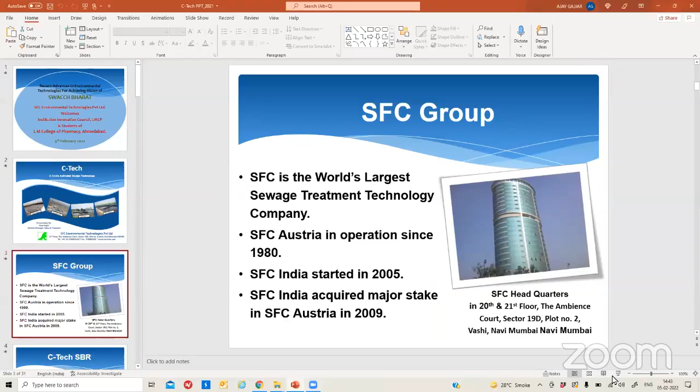Sir, your screen is not visible. You can share your screen, your presentation. Is everybody hearing my voice? Praful bhai? Your voice is available. The presentation is not seen, so you can share it again. Now it's okay? Yes. Now you can see, na? Yes, that's fine. So let's be fast.

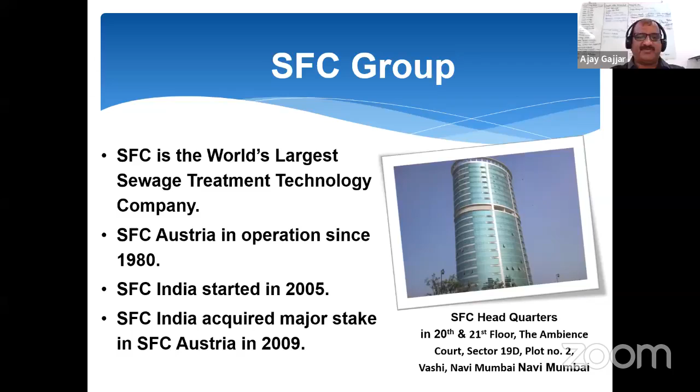SFC is the world's largest sewage treatment technology company. This is basically an Austrian company. In India, we started in 2005, and in 2009 we took the major stake in SFC Austria. So we can say it's an Indian multinational. So what's C-Tech? C-Tech is just a trade name.

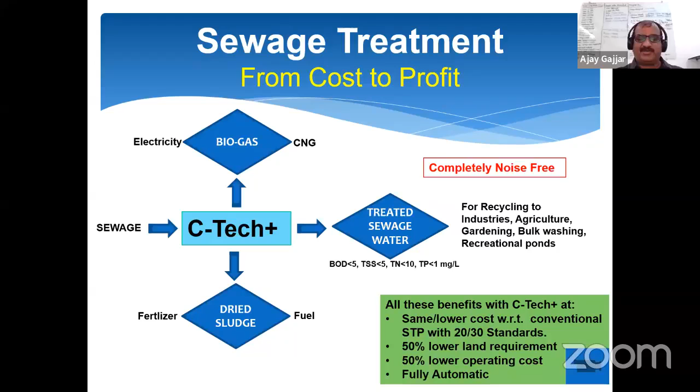You can see that nowadays, with all technologies, if we count the total MLD, we can say 18,500 MLD. And by C-Tech, our SBR technology, we just reached 14,000 in 2021. It is much more even in 2022. Why this thing? Because looking at the norms, the treated water norms, this technology is very robust with lesser O&M. It produces recyclable water at a very low operating cost. That's why we get such large acceptance from government organizations.

We can see here it produces recyclable quality treated sewage. BOD is 5, COD is 50, TSS is 10, nitrogen 1, and total phosphorus less than 1. You can see this in the 2013 CPHEEO manual and National Green Tribunal 2019. They recommended BOD 10; we are giving even less. COD 50, TSS 10, total nitrogen and phosphorus removal. So nutrient removal parameters they have added in the manual. So every STP has to fulfill this criteria.

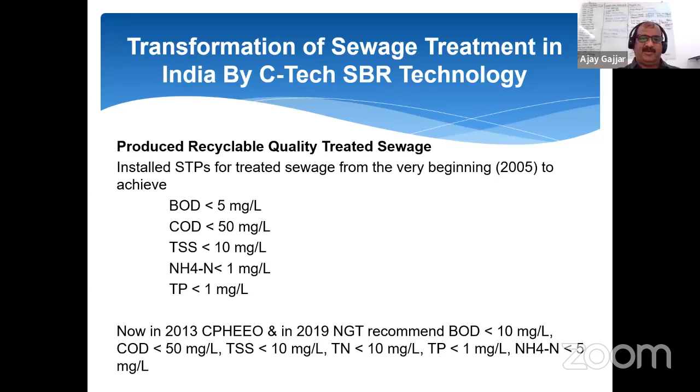Hello. You can listen, na? Yes, sir.

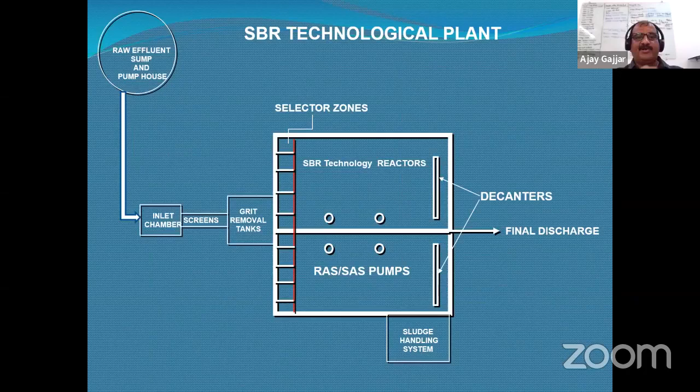All this process comes in a single basin, in 3 cycles. First the raw sewage comes, then filling and aeration for 1 hour, 1 hour is the settling period and 1 hour is decanting. Decanting means we are removing the top supernatant water by our decanter devices. All this process is controlled by our PLC SCADA. So a good monitoring system, no human touch. So irrespective of the inlet design parameters given, we can get very good recyclable quality water.

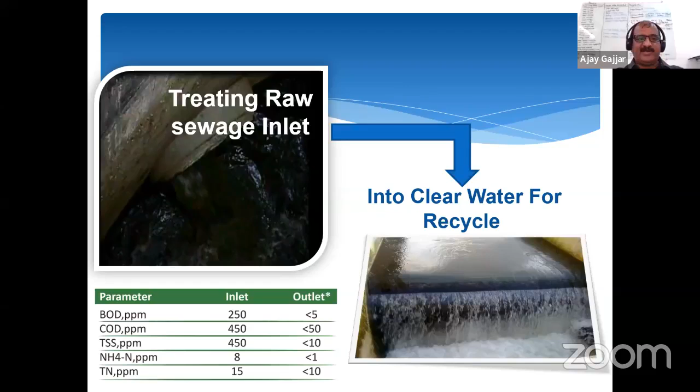Here we can see the raw sewage and how we treat it. BOD is less than 5, COD 50, total suspended solids 10, and nitrogen and phosphorus removal. Another remarkable thing is that we have reduced the land requirements. In government projects, acquiring land is a huge and very critical task. Even government departments internally cannot acquire it because of so many legal procedures. So the earlier pond culture is now gone. Now a lot of societies and residential plots are adjoining the STPs. So land is very important.

Another thing is what happens in these kinds of infrastructure projects. All the sewage treatment plant works come with 5 years O&M, 10 years O&M, 15 years O&M. In some bid modalities, all the electricity power has to be borne by the contractor or otherwise by the government. So after this technology became available, we formed norms so that every technology, including conventional ones, has to be compared. Suppose my capital cost is less, but my O&M cost is very high due to power consumption.

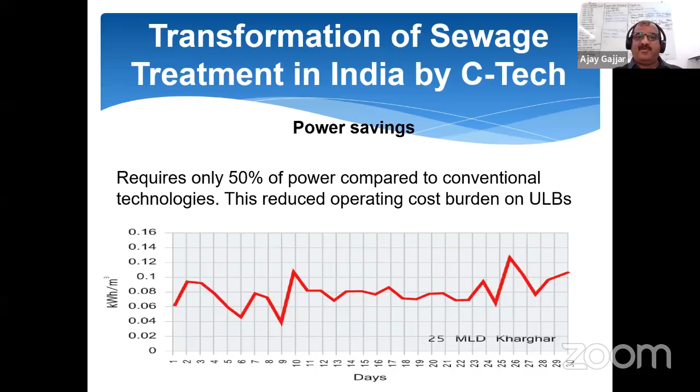So we have inserted many evaluation points based on land and power. So the government can get good quality technology that consumes less power and less land. So there are weightages there. Mostly we consume 50% less power. We can also generate gas, because if my inlet BOD is consistently more than 300, we can utilize the generated gas for power.

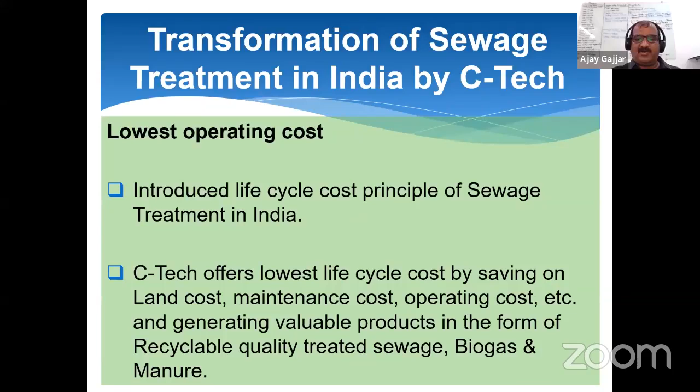As I told you earlier, we have introduced this life cycle cost principle in the sewage treatment plant. Earlier there was nothing over there. Nowadays the government is calculating it. Now we have offered the lowest life cycle cost by saving land cost, maintenance cost, operating cost, and simultaneously generating valuable products in the form of recyclable quality treated sewage, biogas, and manure that is fully digested. We can directly use it on all our crops because it's fully digested.

You see that all the plants are controlled by the PLC SCADA system. See, there are many points, because what we are doing in sewage, particularly this biological process, is just a game of air. Suppose I have to remove some BOD; I have to put air in mechanically or naturally into that water. So per kg BOD removal, I need to supply some quantum of air. It is fixed. What we have done is control by computer how much air I require.

So that's why I save the most power, because of these SCADA systems and the oxygen uptake rate that we have given in our technology and our software. So see, this biological treatment is just live bacteria.

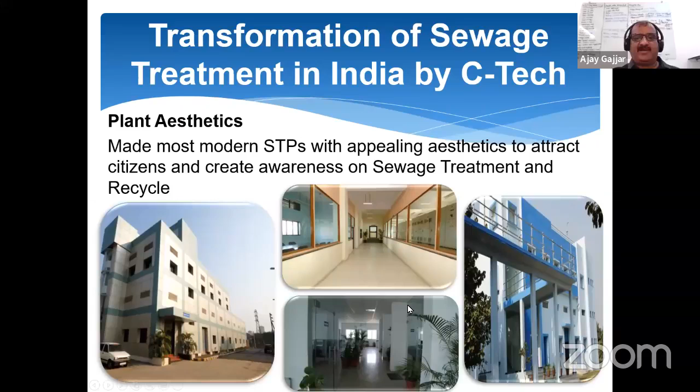You see that we have changed the concept. As I think many of us visited abroad, we must have seen facilities like commercial buildings. So we brought this concept here. You can see this is my 100 MLD plant building. It looks like a corporate office, inlet facilities are there, hygiene, and we have added aesthetic value. It's very remarkable. This is a remarkable thing in India. We just changed the concept.

Treated sewage is not something you can just throw out. It's a source of water. An additional source of water for non-drinking applications, that is industrial, construction, bulk washing, horticulture, agriculture, etc., in non-potable use in India.

We have a setup in Malaysia. That is our largest plant, more than 400 MLD. Malaysia biologically treats the water and supplies it to Singapore through a pipeline. Singapore has tertiary treatment through RO, and they use that water for drinking purposes. In India, at present, there is no need like this. Even if we just fill the gap of non-potable water with this kind of recycled water, it's a big deal for India.

So the government is also sensible. The current government, for the last 10 years, infrastructure projects are developing under Nitin Gadkari sir and many other ministers. They are very dynamic, and they have taken initiative for this large format. Unless and until there is support from politicians and this movement, we cannot get success. It's not only the technology. We are grateful to them and to the people also. And the awareness also; nowadays people are aware.

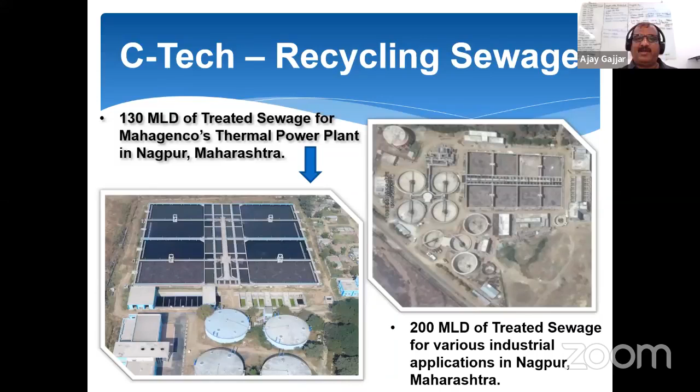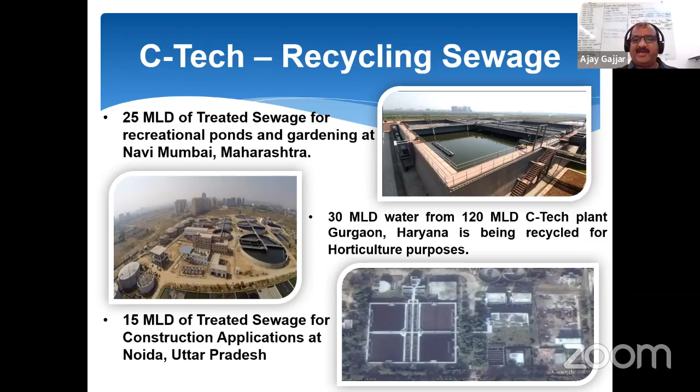So again, we have concentrated more on how we can further improve, because we have just saved power through our technology. We are also using some innovative ideas, because again there are the blowers, how we can use some technology. So our work still continues, and we are still improving, but a lot of innovations we have incorporated.

So adapting this treatment process is an improvement. We have improved our decanting procedure. Decanting means the removal of the water from the tanks, and it is connected with our PLC SCADA. We use high efficiency and long life diffusers. Diffusers are installed in the bottom of the tank. They are providing the air. So we brought this technology from USA, from EDI, and we also improved the material, you can say the poly.

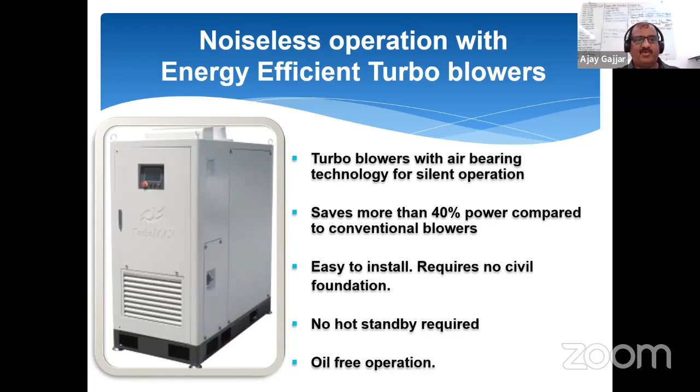Again, besides the liquid waste and treated water, many of us think about what you are doing about the sludge that you are removing. We are removing the sludge at 20% consistency. Still, we have to increase the consistency and make it more dry. So we also introduced the solar sludge drying system from our German associate group. And that dried sludge has a calorific value of about 3000 kilocalories per kg. So absolutely, it's good for cement industries, using it in their furnaces.

Once again, with our SBR technology, nowadays we have expanded in a huge way to a number of plants in India. Now the department is also thinking about further treatment. They are using sand filter beds, which require huge space and different kinds of systems, and the O&M cost is also more.

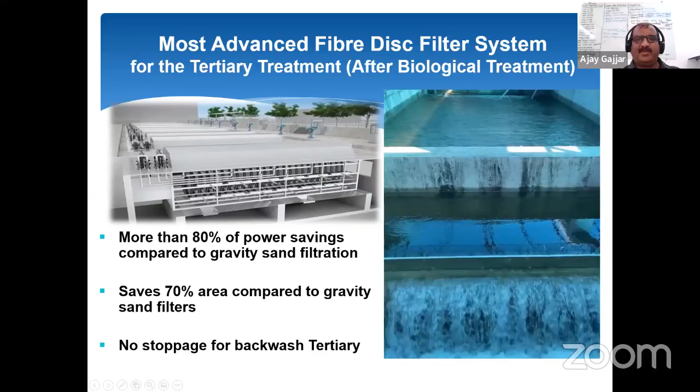Here we can see this is a fiber disc system. The SBR treated water comes here and is further treated, and we bring down the total suspended solids to less than 10, less than 5. Here in the installation you can see the fiber disc. The online cleaning is totally operated by SCADA on a level basis. And there is a total suspended solids TSS reading sensor over there. So if TSS is higher, the gate automatically will not let the water enter this chamber.

This picture you can see was recently inaugurated by our Honorable Chief Minister, Sri Bhupendra Bhai, in Sayaji Garden, Vadodara Municipal Corporation. You can see here the quality of the water. They are using this water in the gardening and for the Vishwamitri, because the Vishwamitri riverfront program will be declared soon. So first they have tapped all these things and improved the water quality.

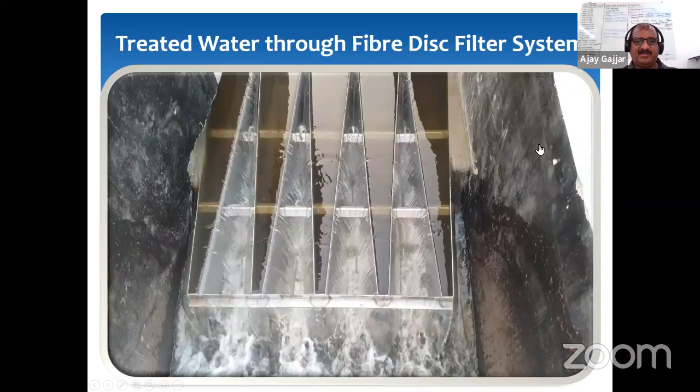So C-Tech can contribute to the state in many ways: providing efficient and reliable treatment of sewage water, reducing water pollution and improving public health, saving our water bodies by completely eliminating the flow of untreated sewage, and establishing water security in the state by converting sewage into recyclable quality water. We help the nation save precious potable water by reuse of treated sewage for various applications, also reducing the burden of land acquisition by saving precious land.

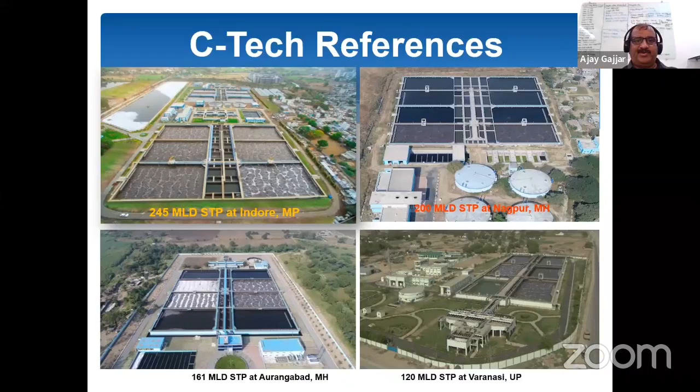This is a completely odorless plant, and adjoining it there is a human community living very close by. This is our home ground, Ahmedabad Municipal Corporation, which recently set up a 155 million liter per day plant.

Here is the primary clarifier, this is the gas chamber, this is the admin building, and this is another gas chamber where they will produce gas. We recently commissioned this gas installation; the gas generation units are under installation.

Treating water, they have already started. I appreciate the efforts put in by everyone, including the corporation and the contracting fellows.

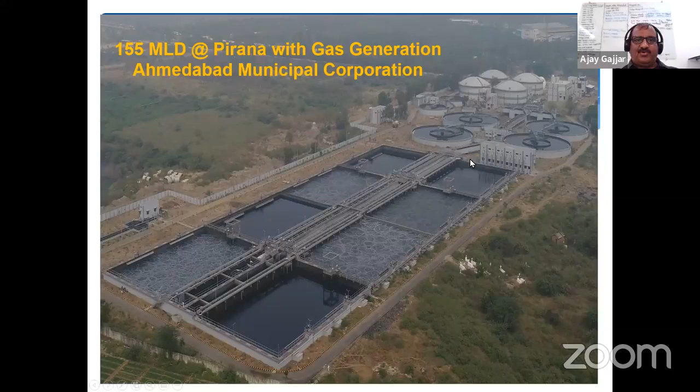So we have discussed a lot of things. Now, this film is very important. You can see the animations, so that the concept becomes clear about what happens when the water comes in, what happens to that water, and how it goes out.

Can you hear the voice? No sir, the voice is not audible. Hello? Sir, the voice is not there. Yes, okay, okay.

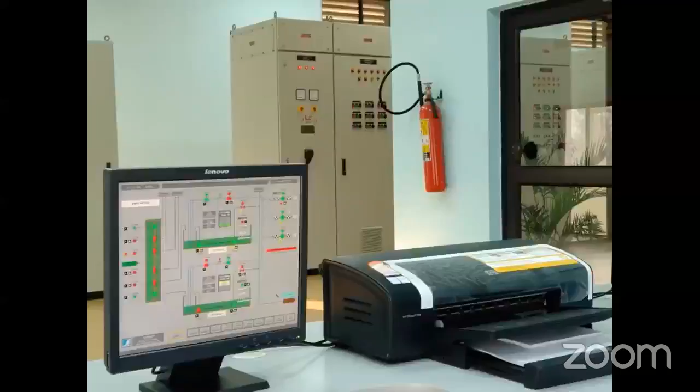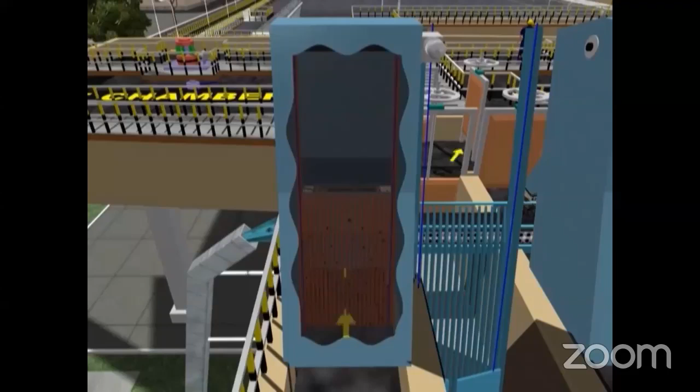The raw sewage first enters into the wet well through coarse screens. These screens remove large floating objects which otherwise clog the pumps. Submersible pumps in the wet well pump sewage to the stilling chamber. In the stilling chamber, velocity of flow is reduced, and then sewage flows gently through fine screens with 6 mm opening to remove fine floating matter, and other heavy inorganic particles are separated and removed.

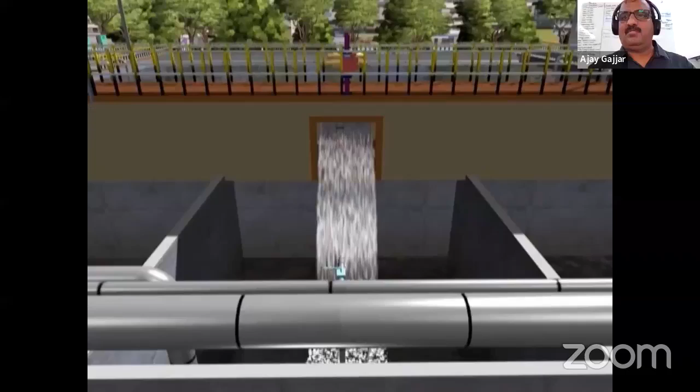Thereafter, sewage is sent to C-Tech basins for further treatment. In the beginning of the C-Tech basin, a selector zone is located. Conditions favorable to good floc-forming bacteria are created in the selector zone, which helps in removal of nitrogen and phosphorus in a later stage.

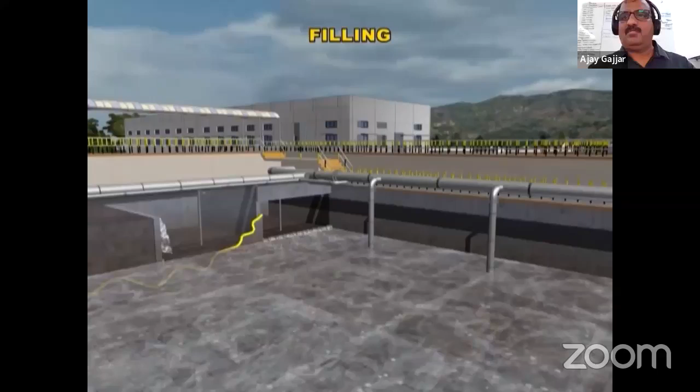Sewage from the selector flows through baffles and then into the main C-Tech basin. Diffusers specially made for the process are fixed at the bottom of the basin to provide oxygen required for the bacteria. The process of carbon oxidation, nitrification, denitrification and phosphorus removal takes place simultaneously in the same tank. It is simply and reliably monitored by online control of respiration rate.

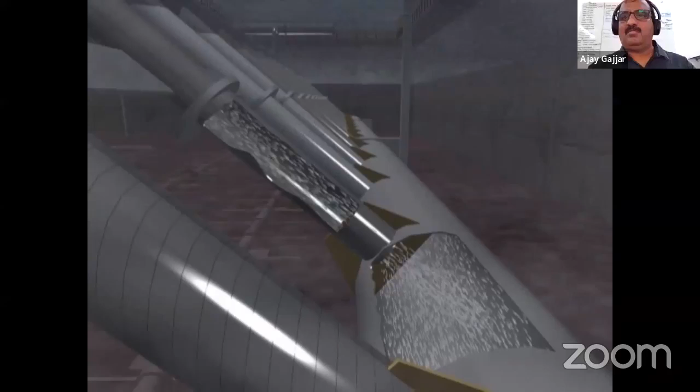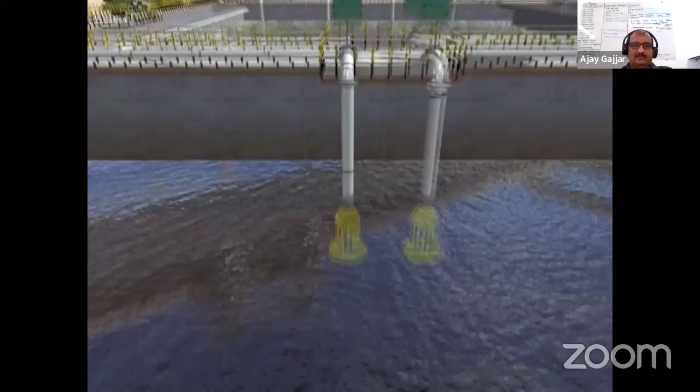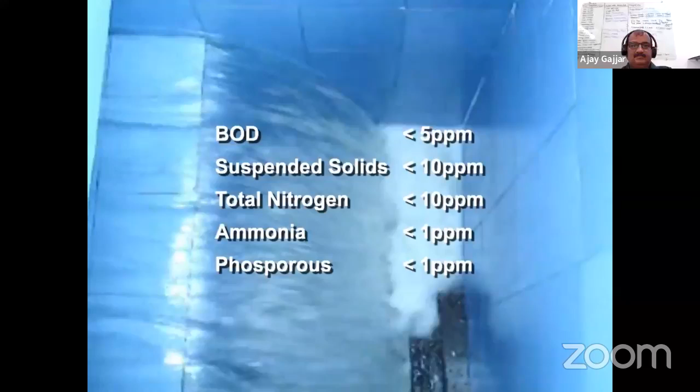Clear supernatant from the top is drawn out via special stainless steel decanters. Chlorine is added to the treated water to remove pathogens. At the end of the process, clean water with BOD less than 5 ppm, suspended solids less than 10 ppm, total nitrogen less than 10 ppm, ammonia less than 1 ppm, and phosphorus less than 1 ppm is generated.

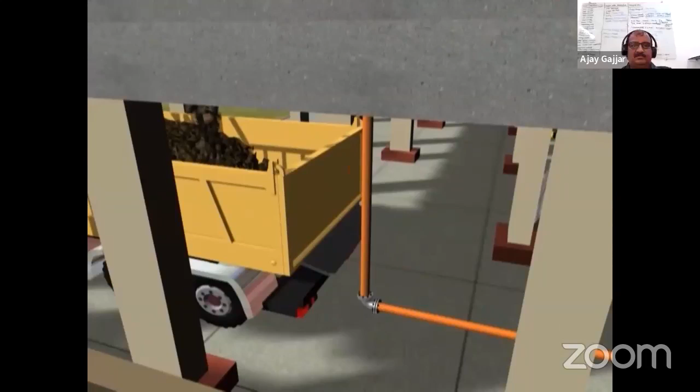Biological sludge generated during the process is dewatered using a centrifuge and used as manure. The entire CTEC SBR process is run automatically through PLC and SCADA. Treated sewage from CTEC can be used for industrial use, gardening, toilet flushing, construction, washing, etc., thereby saving valuable drinking water reserves.

So, hope you enjoyed this.

Hello. Yes sir. Yeah, hope you saw this without any interruption. Yes sir, yes sir, yes.

So after this, we have just talked about the liquid waste, and we are achieving a remarkable achievement in this field. We have been told by the department, now what can you do for the solid waste. Everybody knows when we talk about solid waste in Ahmedabad, everybody has a picture of Pirana, where there is a huge mountain of solid waste. So the department asked us, what can you do? Can you do something about that?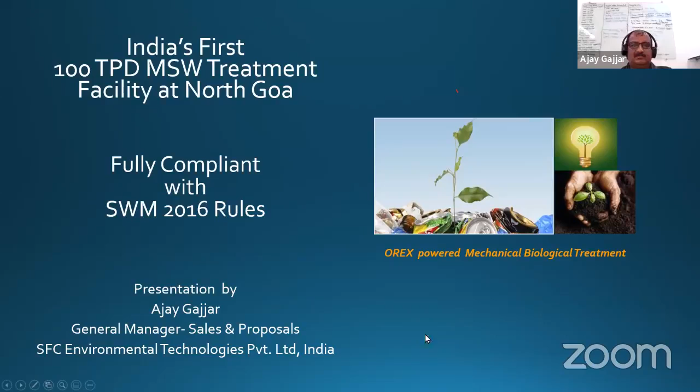So we first established the 100 ton per day Municipal Solid Waste treatment plant at North Goa, near Kalangute, which is fully compliant - India's first plant that followed the SWM 2016 rules with a totally integrated plant. Till date it is the talk of the town.

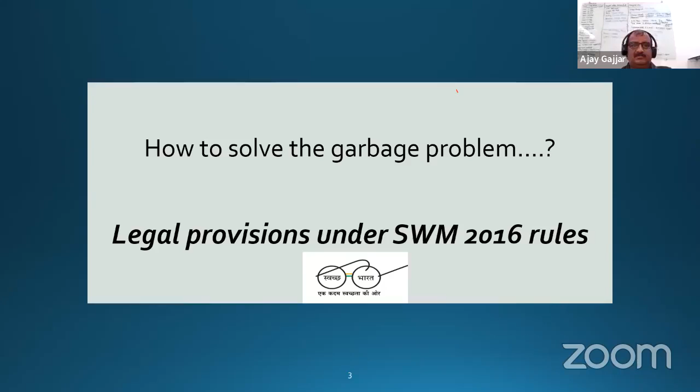So how do we solve the garbage problems? As I told you earlier, the government has put legal provisions under the SWM 2016 rules. The rule says a lot of other things - just to give you a few ideas, what the rule says is that it is mandatory to segregate mixed waste into biodegradable and non-biodegradable fractions.

The biodegradable fraction is to be treated via biomethanation and composting method. The second point is incineration of only non-recyclable RDF having a calorific value of more than 1,500 kilocalories per kg. This high calorific value waste is to be supplied to co-processor power plants and cement plants, because they are compulsorily required to take this material from the corporation, subject to it being more than 1,500 kilocalories per kg.

The emission standards include mandatory online sampling for carcinogenic compounds, dioxins, furans, and heavy metals. Fly ash, residue, and bottom ash are to be sampled and disposed of in the hazardous waste handling facility. Other measures include odor control, effluent treatment, proper enclosed sheds, and health and hygiene safeguards.

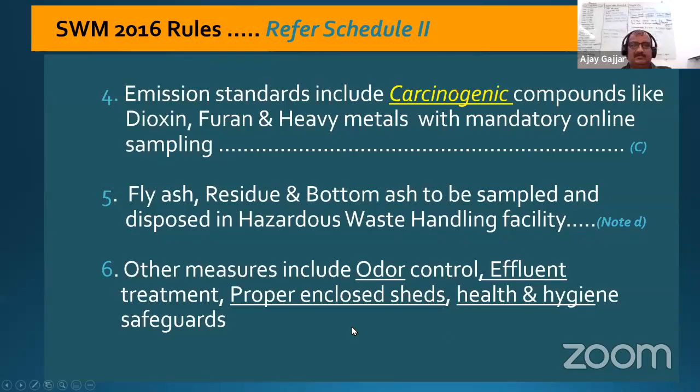So we think about why these provisions are relevant - let's go through the typical characteristics of Indian municipal solid waste. We can see that 40 to 60% is bio-waste or organic, 5 to 10% is recyclable, 20 to 30% inorganic or non-recyclable, 15 to 30% inerts like sand and stones, 50 to 80% moisture, and calorific value is 600 to 800 kilocalories per kg. This is a fact - we have a very poor mixed waste characteristic.

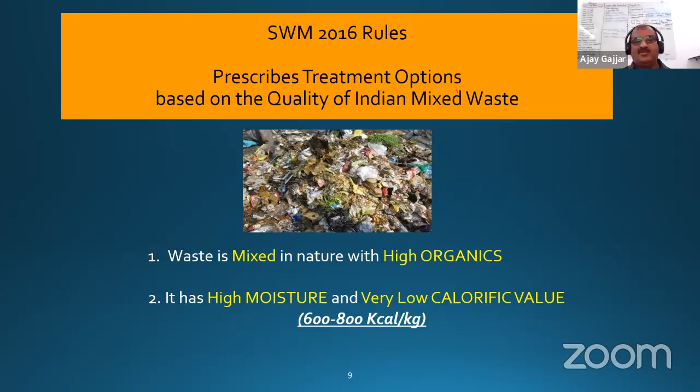In the dry fraction, we have wood, chipboards and rubber, textile, glass, metals and miscellaneous, while bio-waste is 60% of the wet portion. So the waste is mixed in nature with high organics, high moisture and very low calorific value. These are the characteristics we observed, both from what our engineers visited abroad in many countries and in India - it's a unique threat in India, this mixed waste.

That's why the new rules emphasize recovering recyclables, segregating mixed waste into biodegradable and non-biodegradable fractions, with biomethanization and composting for the biodegradable fraction. Only incinerate RDF with calorific value more than 1,500 kilocalories per kg - only then can we incinerate. Send this RDF, if it has more than 1,500 kilocalories per kg, to power plants, cement plants and processing units. Install online monitoring lab equipment to measure emissions and other parameters at the hazardous landfill sites.

Facts and figures of India's first integrated 100 TPD solid waste plant at Goa. This is 100 tons per day capacity, occupying a total area of 5.5 hectares. Capital investment is 150 crores for 10 years.

We are paying back 30 crore per year for 10 years. There are various modalities in government departments. First is the EPC contract, where the project has a fixed budget for capital and O&M, and bidders compete, with the lowest bidder getting the job, provided by the government. That's called EPC modality.

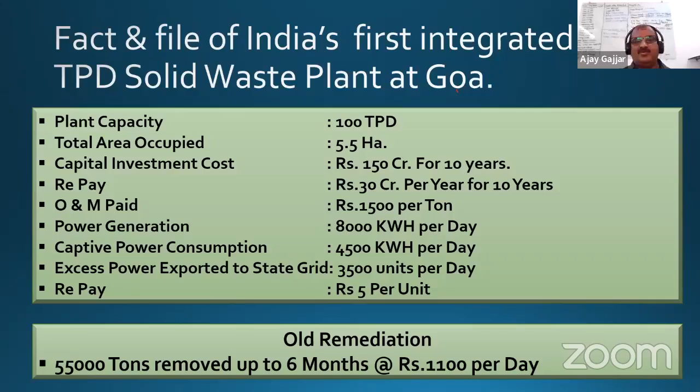If anybody visits the Pirana site, people are saying that mountain is being brought down and fantastic work is going on. Okay, nothing is better than something they are doing. But this is not a new treatment, it's an old remediation. They are just removing the old mountain of garbage through vibratory screens and such things. But nothing is better than something, even if they are not doing it perfectly.

Here is a brief layout of our garbage plant in Goa. We can see weighbridge trucks incoming. There's a video here so we can understand easily.

In short, this machine is the trump card of the whole process. As I mentioned, segregating wet and dry waste at source, no one else can do this. So we introduced this Italian technology company, and we also have one from France. This is called the OREX machine, and it segregates the wet and dry waste, organic and inorganic.

Accordingly we have set up processing lines, and we also get some recyclable quality material. Nothing from this plant goes to waste, only below 10% goes for landfilling. For example, for 100 TPD, only 10 tons go to the landfill as grit and such. All the rest of it is recyclable.

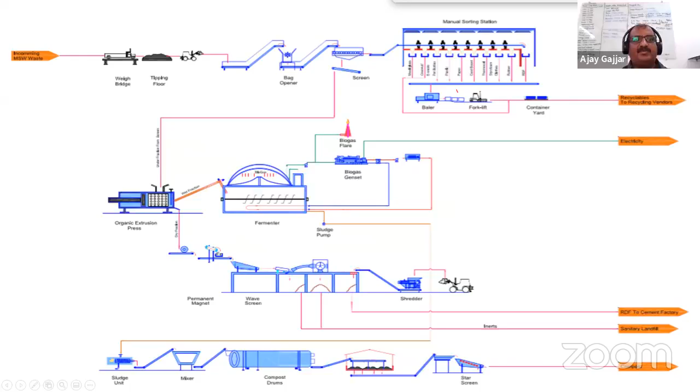Here are some photographs showing how it looked earlier, the existing dumps and waste. It has since been remediated and cleared, land recovered, RDF sent to the ACC Wadi, and compost used in house. We established these new plants.

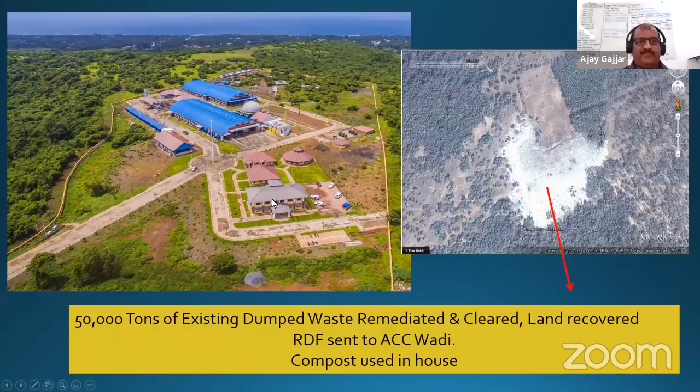Here is the admin building, and these are the plants. This is the remediation area with a multi-deck vibratory screen. Many of us have seen this at our Pirana site. This multi-deck vibratory screen is used to remove the old waste.

From this old waste we get compost, which is 25 to 30%. This is high quality compost used as fertilizer in agriculture. 50 to 60% is RDF, having high calorific material like plastic, paper and cloth, used as alternative fuel for cement factories to produce additional electricity, since cement and power plants must buy calorific material at a certain level from AMC.

We reduce the residuals going to landfill to 10 to 15%, so not every bit of garbage is just dumped. This saves a lot of land volumetrically.

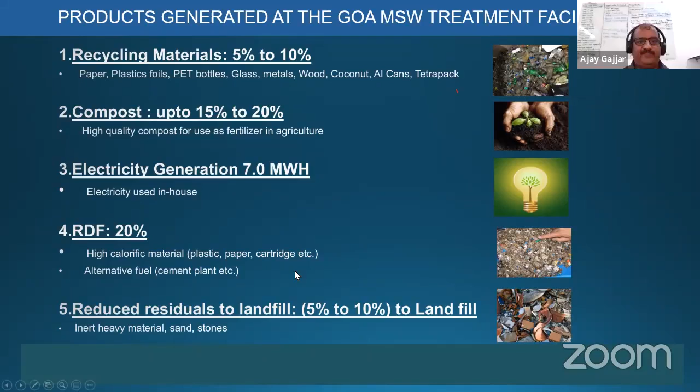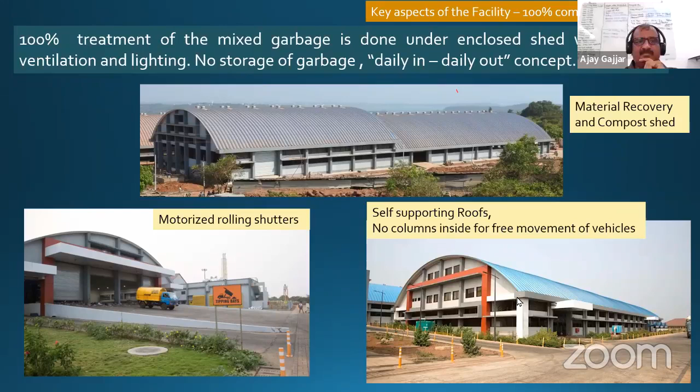So, input feed bunkers, chain belt conveyors. You can see this is the tipping area; all the solid mixed waste will come by truck over here and they empty it on this belt.

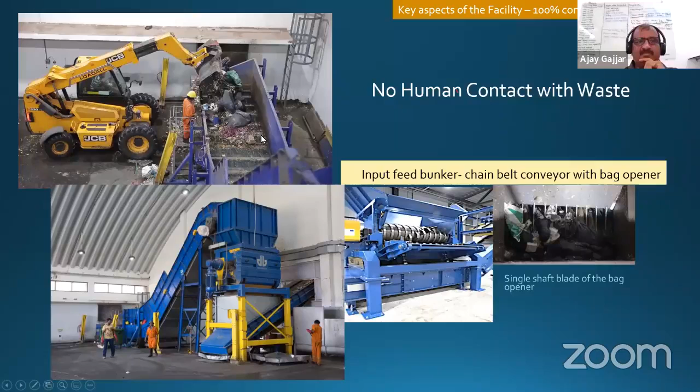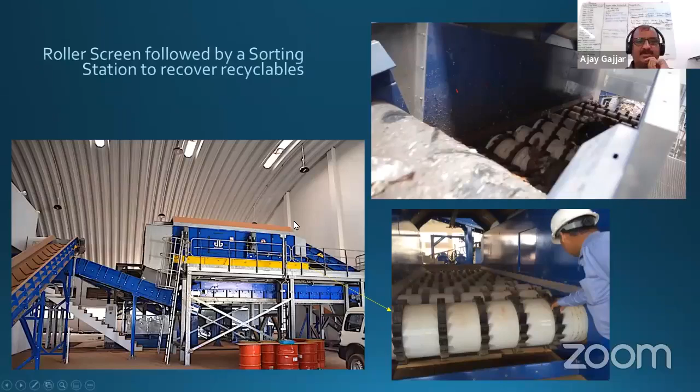These are automatic bag opener machines, the crusher, segregation roller screens, and over here the sorting stations for more than 15 fractions. This portion is only manual because we have to give some jobs also to the local people, just hand-picking fractions over there. They just have to stand, and all this work will be continued. They have to just pick up what they are dedicated for. It's so easy.

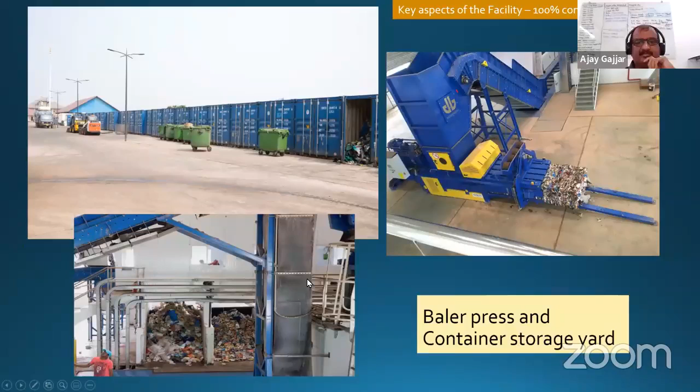You can see a lot of fractions, plastic bottles, glass bottles, and like this there are 15 sections over there. This is a baler press. So we just pack it for container storage.

Now, as I told you, 100% of the mixed waste is segregated into wet and dry fractions by Orex technology. We introduced this in India in a big way. This machinery is completely technology from abroad, and Indian mixed waste is very different; in India everything should be robust and long lasting, because if we adopt foreign technology blindly, maybe we fail, because they are very sophisticated. So we have changed it as per our engineers' inputs.

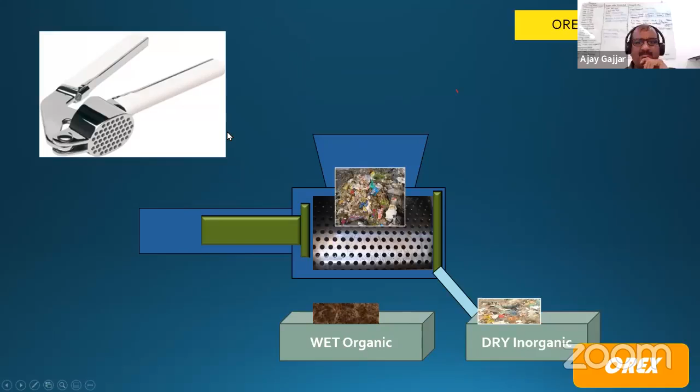So the segregated pure organic fraction comes from this Orex here. What happens? The mixed waste is pressed. I am giving a small portion of an animated film on how it works. You can see that. See, it's just like our garlic crushing machine. Pressing. So the same kind of machine works here.

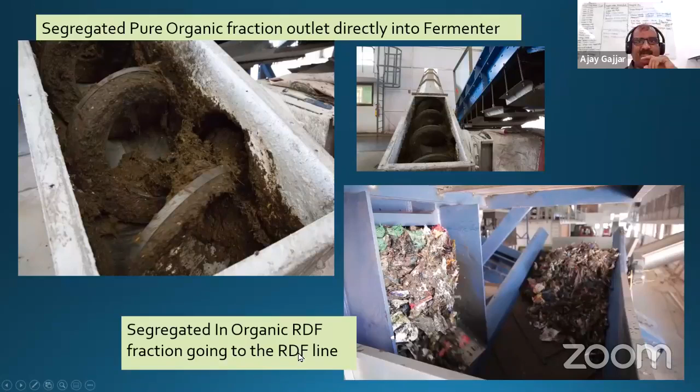So this is the crushed material. This we can say is the pure organic fraction. It goes to the fermenter, and the rest is segregated through the RDF line. This we can call the inorganic fraction.

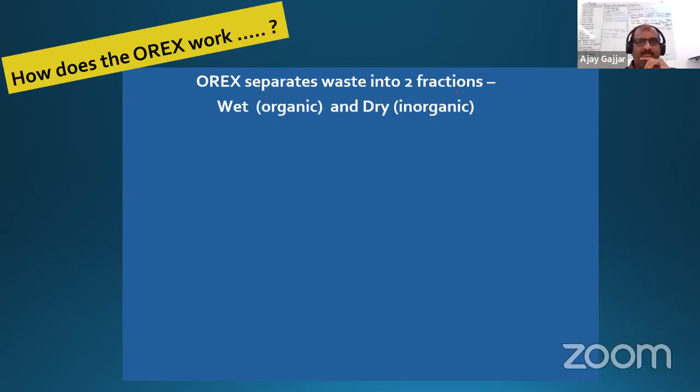Most important step: segregation. As I told you, it's a key aspect of municipal waste. Only then does the downstream treatment process work. If we cannot adopt this, all our processes will fail. So as we discussed, Orex separates the waste into two fractions, wet organic and dry inorganic.

The organic or wet portion goes for fermentation, biomethanation and compost. Through biomethanation we can produce electricity, and the compost we can use as manure. And whatever is inorganic or dry, after removal of heavy metals with the magnetic separator and removal of other metals and many other things, after specific treatment we can use this RDF in thermal processing and co-processing units.

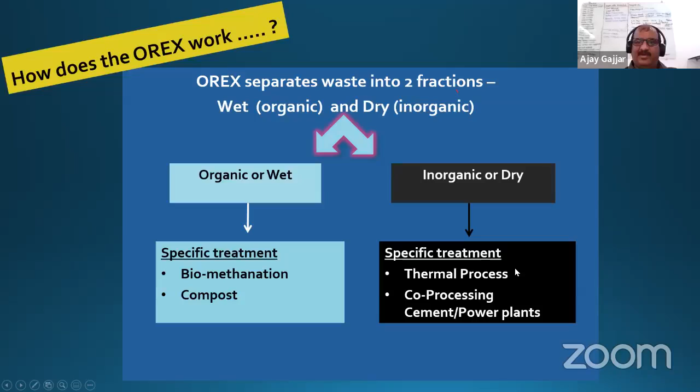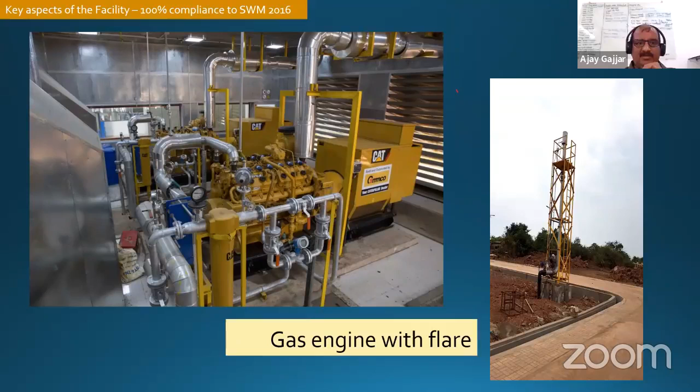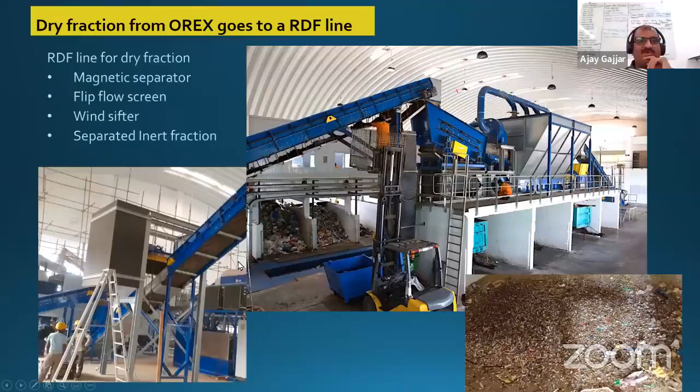Now the dry fraction from Orex goes to the RDF line. As I told you, the magnetic separator, flip flow screen, wind sifter, which separate the inert fractions. You can see these are pure inerts. Ultimately this should be less than 10% of the total capacity of the plant. In the manual it is 10%; we are achieving less than 10. That means all the recyclables, nothing goes out from this plant. It's a fully automated PLC SCADA room monitoring all the activities.

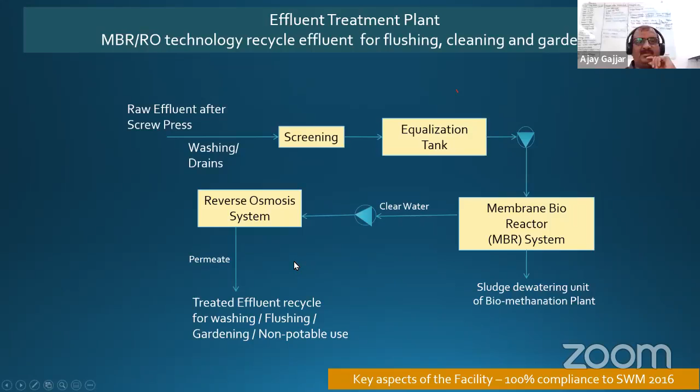Now, the liquid waste, what do we do? The raw effluent from all the plants, after the screw press and the washing drains, after screening comes into the equalization tank. Then we put the membrane bioreactor system. That clear water goes to reverse osmosis, RO. After this, we use the water for flushing, gardening, and the compound. That is our effluent treatment plant set, because the government manual asks that every garbage plant must have this kind of facility.

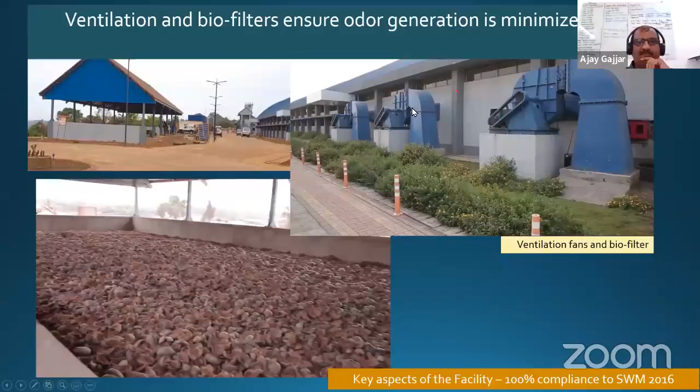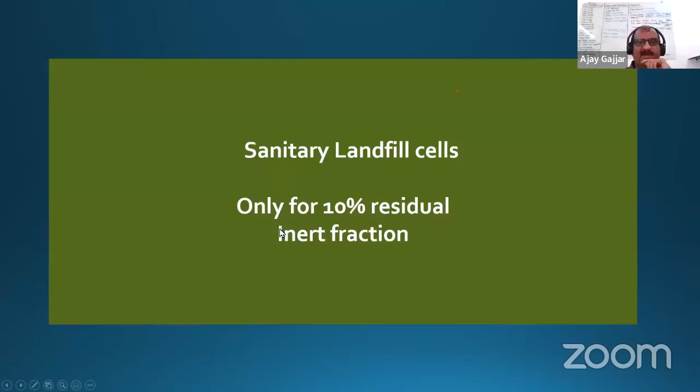So as we have seen and discussed, Indian garbage does not have the wealth or gold as commonly thought. Even today, government is asking tenders on the PPP, public-private modality. What they see is that there is wealth. But it's not like that, that you can sell, earn lots of money, and put that money into setting up the plants. It has some value, as I said, which can offset part of the plant operating cost. First of all, we have to treat this not to generate revenue.

Even today, so many departments are still debating whether to go with EPC annuity or the PPP-based modality. But the PPP model has absolutely failed here, except in bridges, roads and some entertainment segments. Because even the contractor invests money to earn something. If they are not earning much, the project is not viable for him, and finally the total project goes in the box. We have to change the modality of inviting bids to allot these kinds of projects.

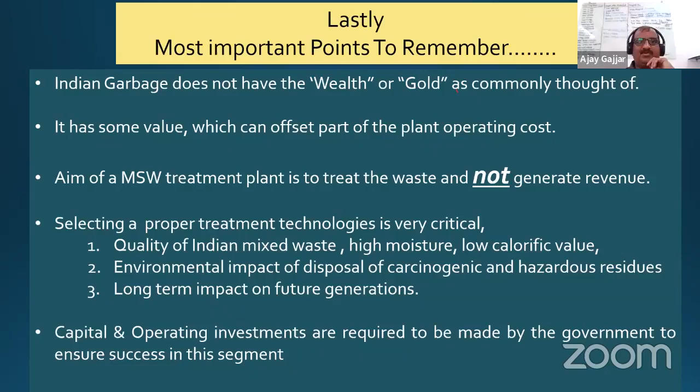Why am I talking about this? Earlier we discussed liquid waste, and I showed you a lot of sewage treatment plants on SBR. But even after 10 years, the same situation, because many corporations expect that somebody will come, invest, and then operate. But this modality will not work for every project. In water, wastewater and solid waste segments, that modality is absolutely failing and will fail. So nowadays many departments are slowly changing the modalities in their bids, particularly for solid waste.

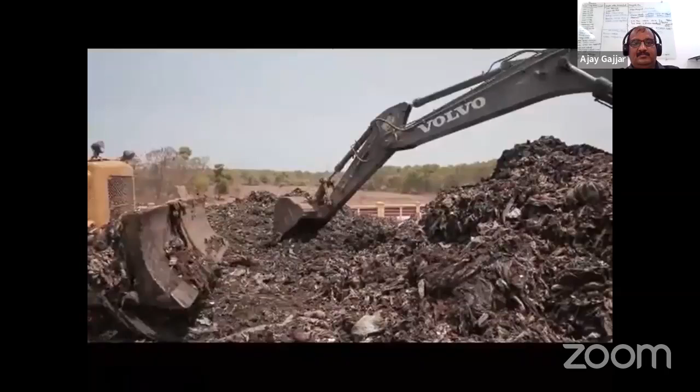The team at SFC set themselves a target of not just building a waste treatment plant, but of defining the solution to manage India's municipal solid waste. Even while the new plant was being constructed, the adjacent mound of waste was taken up for remediation.

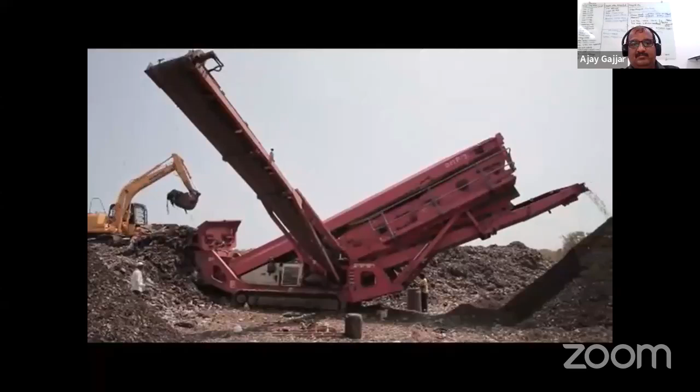2 multi-deck vibratory screens were pressed into service along with a battery of heavy machinery and carriage vehicles that worked around the clock, and within a record 45 days, 50,000 tons of the old dumped waste was screened and separated into refuse-derived fuel or RDF and compost.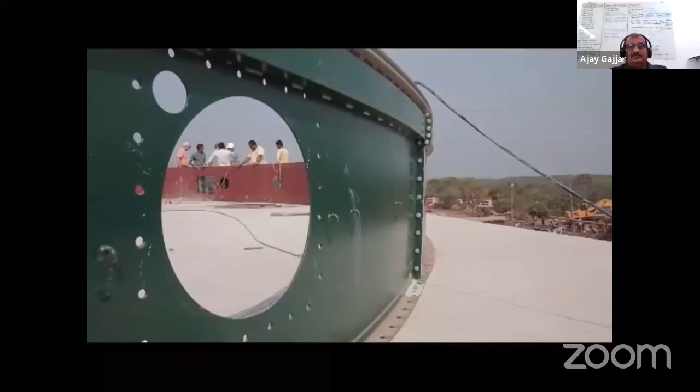Each process was being closely monitored by a team of experienced engineers to ensure the highest levels of quality were achieved. The installation of machinery was also supervised by trained technicians that flew in from equipment manufacturers in Italy, Germany, and other countries. After 15 months of hard work, India's first integrated solid waste treatment plant, fully compliant with SWM 2016 rules, was finally ready for operations.

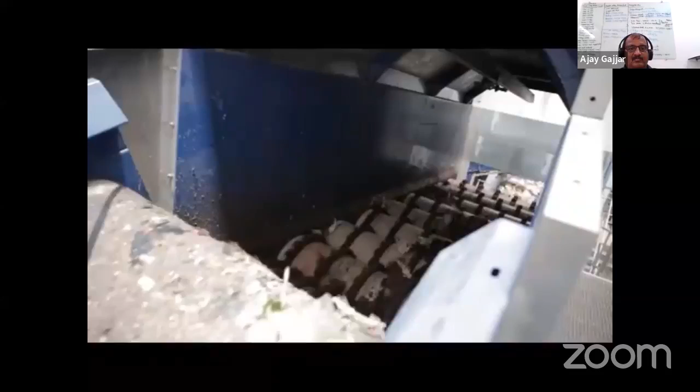The waste is brought into the plant by panchayats in trucks and is weighed before being unloaded on the tipping floor. The front loader then takes this waste to the chain conveyor, which carries it into a bag opener. The bags are automatically opened and the contents are carried by a conveyor to the mechanical roller screen, where large-sized

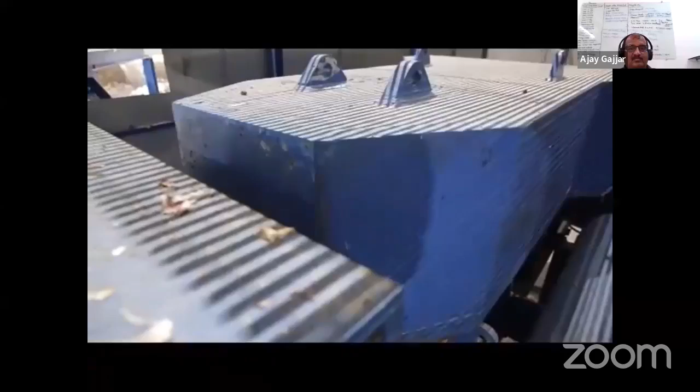recyclables are screened and transferred on the sorting line, and the waste is sorted into multiple recyclable fractions. These fractions are baled and stored separately in proper containers before being sent to recyclers. The underfraction of the roller screen is taken to the Orex, which is an organic extruder press.

This unit automatically segregates the mixed waste into dry or inorganic fractions and wet or organic fraction. The organics are extruded out of the mixed waste under very high pressure in a pulp form. More than 95% of the organics, along with moisture, comes out into the pulp from the mixed waste.

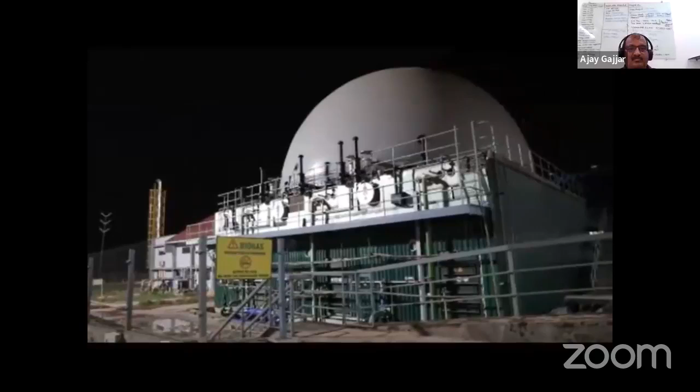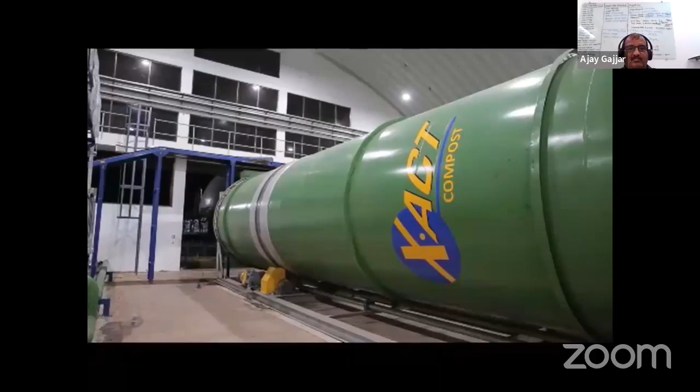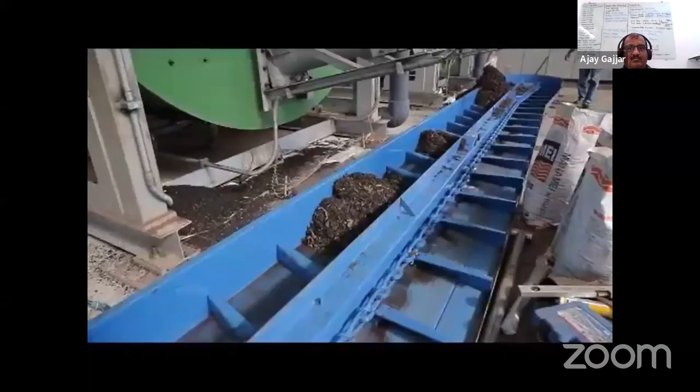The digested sludge from the digester is then taken to a screw press where it is dewatered and the fibers are fed into an in-vessel composter that converts it into compost. The dry remainder from the Orex is further taken via a permanent magnet to remove ferrous metal, followed by flip flow screen and a wind sifter for separating the grit and the RDF.

The RDF is being used for co-processing by cement companies, and the grit is used for filling up low-lying areas or disposed into the scientific landfill. All effluents from the plant, including flushing, floor washing and sewage, are taken to an equalization tank. Suspended solids are settled in the clariflocculator. pH is corrected and the effluent is then taken

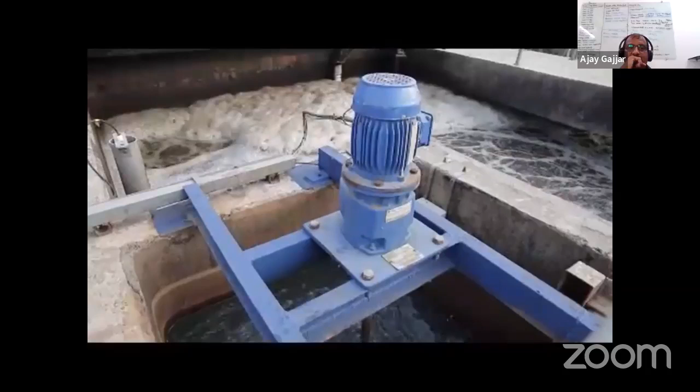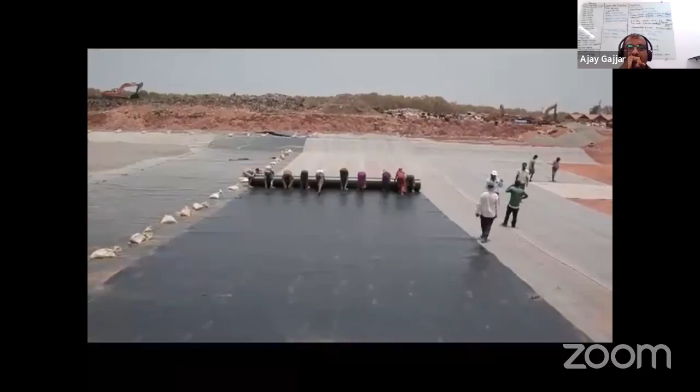Once the organics have been removed, the effluent is pumped into a reverse osmosis unit for removal of dissolved solids. The clean and treated permeate is then used for gardening, floor cleaning, toilet flushing, and other non-potable functions. All that remains at the end of the process is the grit, which is less than 10% of the waste received. This is put into a scientific landfill that is built and lined with bentonite, HDPE, and geotextile covers.

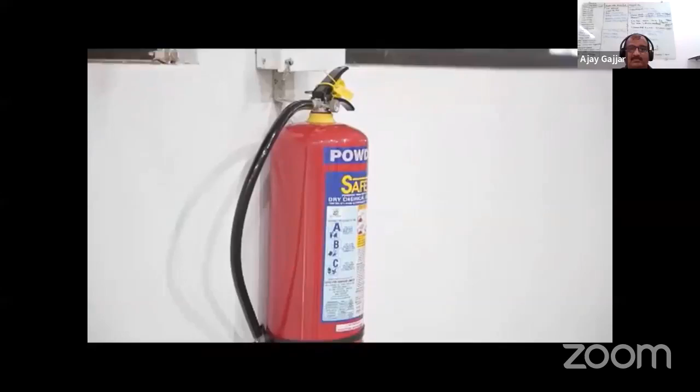At Hindustan Waste Treatment, safety is of paramount importance. The complete plant can be monitored and operated from a central control room via PLC SCADA-based systems. The engineer on watch also has got a complete visual contact with key areas of the plant through a series of cameras. We are also equipped with all necessary safety features that includes a full-fledged firefighting system and an emergency quick response vehicle. Key personnel are trained in the use of the safety equipment.

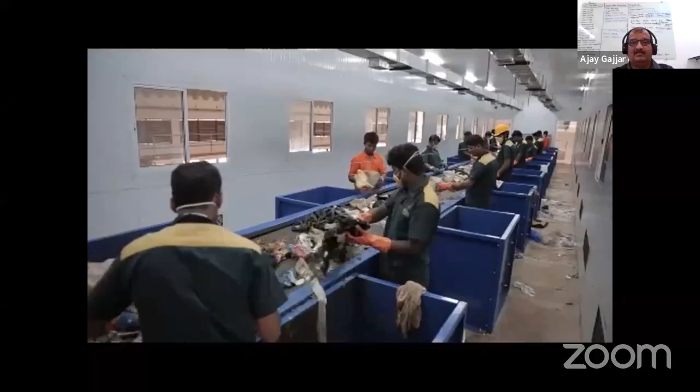The odor levels are kept under control by effective use of large volume ventilation fans that draw the air from the process area and pass it through a biofilter before it is vented to the atmosphere. The ambient air inside the sorting station is always kept clean and cool by using air filter and cooling systems. At HWT, we ensure that health and hygiene of our employees is given top priority, and special efforts have been made to integrate these features into the design.

Already see a noticeable change in the surrounding natural environment. At Hindustan Waste Treatment, it is our aim to transform India into a true Swachh Bharat.